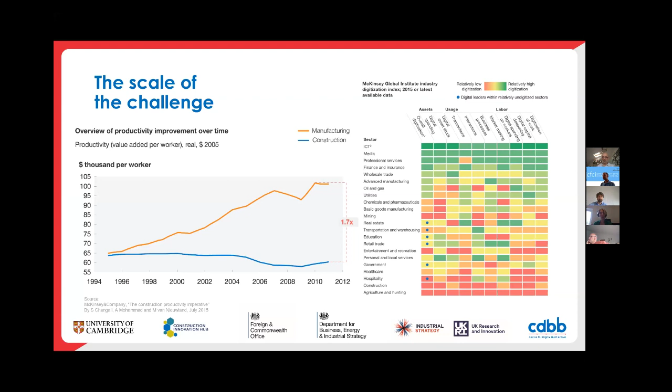So the government has set up the industrial strategy around supporting the construction industry, so the construction sector deal. This is £170 million that's been given to the construction sector for various projects to help us reinvent the sector, support the sector for the 21st century. It's about recognizing for us that by increasing the adoption and use of digital and off-site manufacturing technologies and techniques, we can improve productivity and we can improve life of people within the UK.

So this is what we call a digital built Britain. We think when you're building anything, it could be a building, it could be a piece of infrastructure, there are four main stages. We talk about the design of that building. And at that stage, you need to think about what data do you need? How are you going to share that data? How are you going to make sure that that data is secure by default? How are you going to make sure that you're thinking about who needs to see the data and how they need to see the data?

We need to think also about what about our smart contracts? How to procure, taking into account the data is a really important part of that jigsaw. And we think that this will give us opportunities for new careers and new businesses within the built environment.

You've then got to build your asset, your building, your piece of infrastructure. And we really need to look at digital construction techniques. How do we manage the information? What manufacturing technologies do we need in that build stage? What about kit of parts? What about off-site construction? And then how does digital bring that together? How do we make sure that we're sharing that data securely and resiliently so that contractors, the clients, they can all talk, they can all share appropriate data?

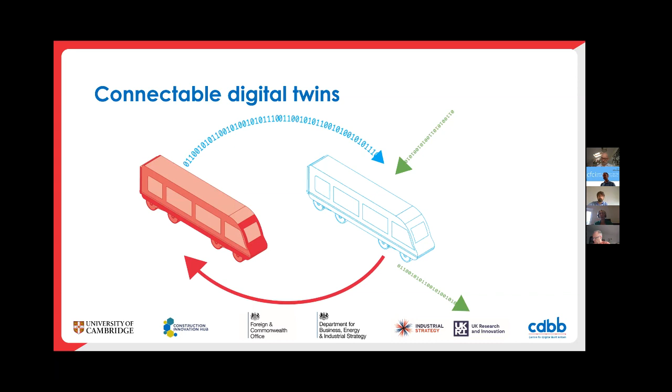You can also have information flowing into that digital twin and out from that digital twin from other digital twins, so connectable digital twins. Imagine you have your transport system here in red. It would be great if we could connect that up with the energy system and the water system, and this is what a national digital twin will do on a much bigger scale.

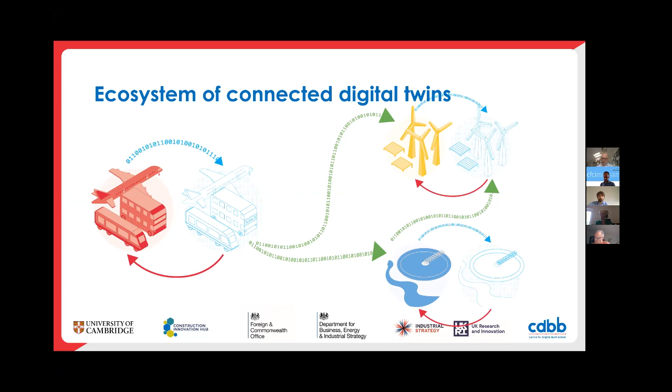So essentially, you have a cyber-physical system. You have your physical system, the world in which we live. For us, we define that as the built environment. That's the remit that we sit in. But of course, it goes out to finance systems, to the natural environment, to the social environment. And by collecting data, sending it to the cyber system, if you wish, modeling and sending interventions back, you then have a connected ecosystem of digital twins.

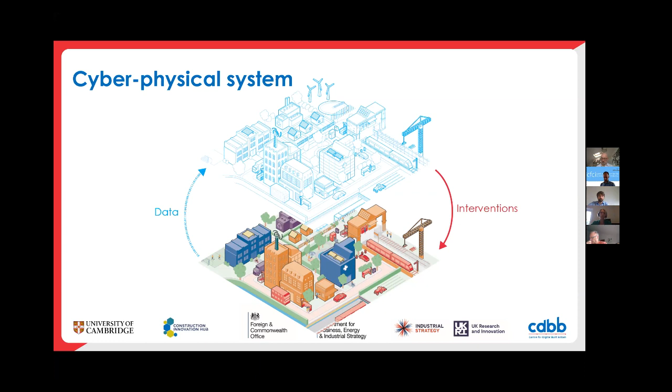The benefits of having this national digital twin are bluntly better outcomes to the public per whole life pound. So we're not just talking about the CapEx at the beginning of a project, we're talking about how do you run the whole life of your asset and how does that affect the people, the businesses, the economies that are attached to that asset. So clear economic benefits, but there will be new businesses.

This is a new way of thinking about systems, a new way of thinking about our infrastructure. New markets, new services, new business models will arise. We're not going to make our net zero targets unless we use our data better. And the National Digital Twin is exactly one of those. It's about creating less disruption and less waste.

It's about being able to do the calculations properly in a holistic sense so that we really know whether this change on this building has a positive impact on carbon, on energy, or whether in the holistic sense, actually it's neutral or negative. So the National Digital Twin has a number of benefits that will come out of it. It's not something that you're going to see turn up next month, but there will be more connected digital twins that allow us to progress towards the National Digital Twin.

I wanted to talk a little today. We're all in a very unusual situation. The COVID-19 pandemic has made us think about how do we work, how do we live, how do we use the buildings and infrastructure in our environment. So this recovery, resilience and transformation in the construction sector is very much at the forefront of our minds at the minute. And we at CDBB have three main ways where we think we can support that.

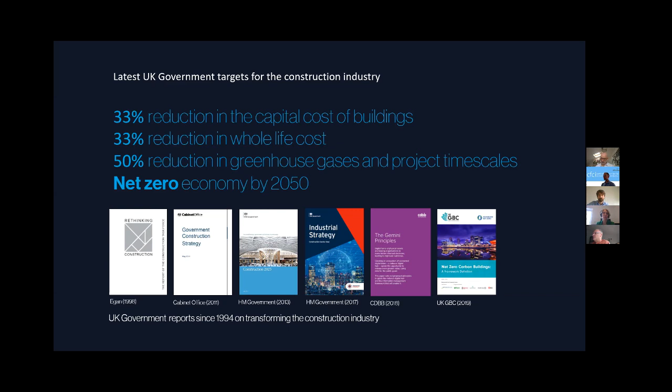The UK construction industry is notoriously expensive. I think I've seen international figures showing that the UK is pretty much the most expensive country in the world to build any building. London, New York and Tokyo obviously vying as the leading cities, but as a country we are very expensive. We don't build efficiently enough.

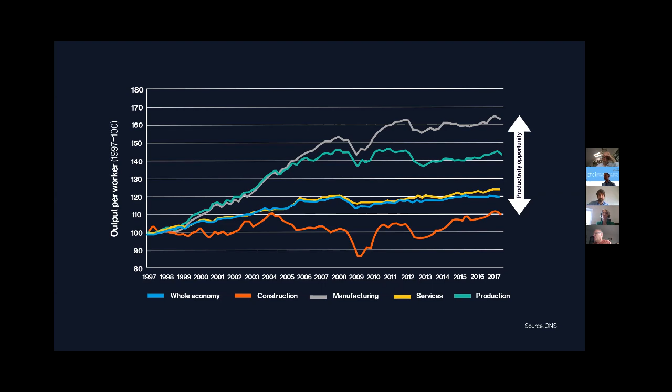So these government targets have been set to address historical inefficiencies of fragmentation and poor productivity of the UK construction sector. We believe that BIM can improve productivity dramatically, and will also create the need to rethink our current working processes and implement more highly integrated project design and delivery processes. So we go to the next slide then.

So this is quite an eye-opener if you're an architect. Remember, we're only humble architects. We're not scientists or people that are that specialised. But when you realise that your industry, the construction industry, accounts for nearly 40% of all UK carbon emissions, but also about the same percentage of all global carbon emissions. That's the construction, manufacturing of buildings, but also the running of buildings.

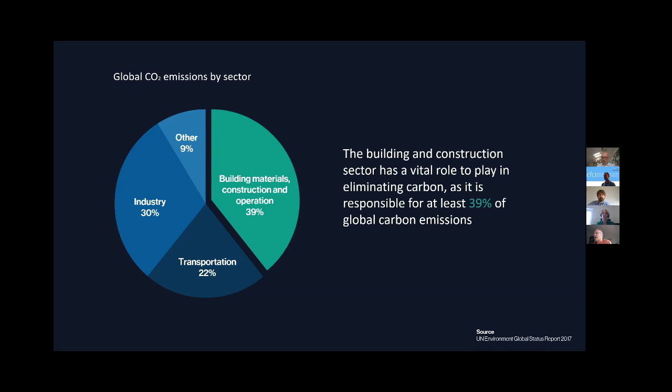This is identified by the United Nations, and our industry could have a huge impact. It's the largest single sector in the world, and therefore we can have the biggest impact for reducing carbon emissions. So there's a huge opportunity.

So this slide is really trying to illustrate that, as we all know, on the left you've got the average carbon footprint of a UK citizen at around 10 tonnes per year. So we thought, well, if you divide the total annual carbon emissions from the UK construction industry by the number of registered UK architects, just out of interest, you come up with a figure of 1,365 tonnes.

So by anybody's standards, architects have a huge gift, an enormous social responsibility to drive down the carbon footprint of their buildings. We can have far more impact than the vast majority of people in society who, even if they cycled everywhere, became vegans or didn't go on holidays using aircraft, could probably only just about halve their carbon footprint, which would be a tiny smidgen compared to what architects could do. So we think there's a huge opportunity here for us to grab. Next slide.

So this again is quite an eye-opener, this slide, for my profession. We're all focused in construction on CapEx. We're all trying to drive down to the lowest construction cost, and until fairly recently, and still not particularly widely in the industry, people are not focusing on the overall life of the building and what it costs. So we've researched and found out that actually 80% of the cost of a project is during the 30 years of operating that building.

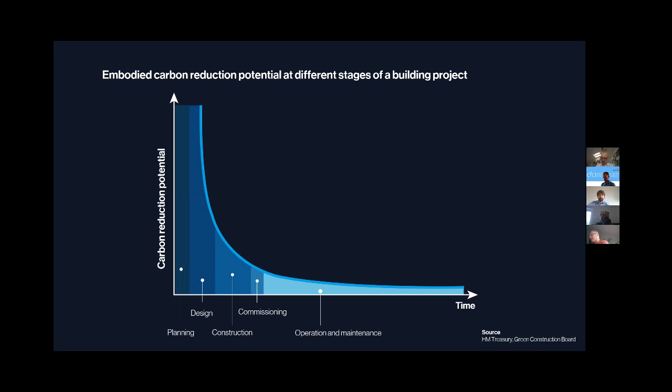Contractors don't get involved in projects until after they've got planning approval, and sometimes not even for a significantly longer period after that. So contractors are left with very little wriggle room, very little space to actually make savings in whole life cost and whole life carbon. It's very much the design consultants who have the golden opportunity to lead the industry. And I believe architects have been marginalized for 30 or 40 years, and it's now an opportunity for us to lead from the front for a change. Next slide.

So our aim is to integrate whole life costs and carbon considerations from the earliest stages of concept design and throughout the design development. Firstly, we've had to standardize information delivery processes and develop a protocol for better information management using BIM. We believe BIM is going to be at the heart of the revolution or evolution that's got to take place in the use of digital technology in the design of the built

environment. We've had to automate repetitive tasks and processes of integrating whole life costs and carbon through the development of prototype software. And we've developed an application to prove our concept. We're actually at a stage now where we're talking to funders to take this prototype application and turn it into a marketable piece of software that will benefit the industry more widely. Next slide.

So how have we defined 7D? We're all aware of the 3D capabilities of BIM. However, the true potential of BIM is in the data attached or linked to the 3D model. This information can be about time, capital cost, environmental performance, durability of components, as well as operational maintenance costs and carbon. All of these considerations together encompass the whole life, holistic scope of whole life cost and carbon.

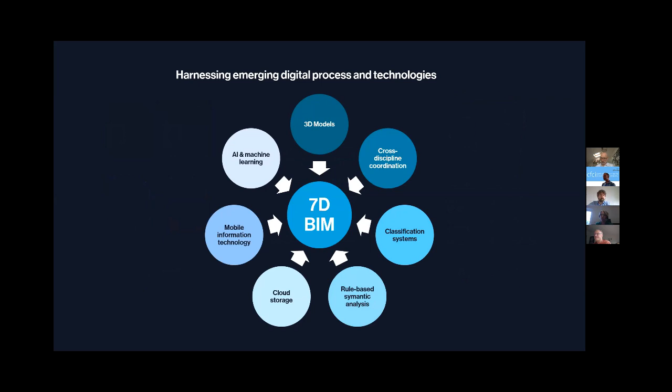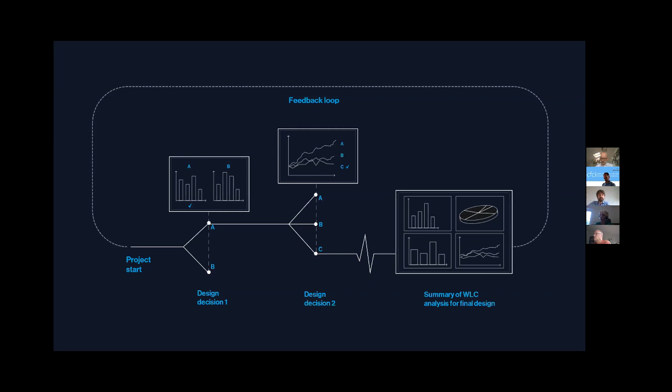The result is a design decision support tool, allowing us to make informed decisions at key milestones during the design development process. The decision-making process, including options explored, is thereby documented and summarized for future reference throughout the built asset's life cycle. Our prototype consists currently of 6 distinct modules. Each of these is a proof of concept in its own right, demonstrating different aspects of functionality.

At the core is the web app. This is where the actual calculation happens and project information is stored. We decided against the desktop app for better accessibility and a quicker deployment across large project teams. There are links to existing cost databases. Currently, we support 3 different sources, although in the long term, we hope to build on live data that is fed back through a standardized process.

Plugins allow us to pull in model information into the web app and also present results back to the designer, supporting them during the decision-making process. While we have dashboards within the web app for easy dissemination of results, we will allow stakeholders to integrate the output within their own business intelligence systems, such as Power BI. To allow integration with an ecosystem of related applications, we will provide an API using Swagger.

Simplicity and a low entry level are important aspects for our team, allowing the user to engage without complex barriers and making it viable even for early design stages. We can start with something like a volumetric massing model, just an example here created in Revit, to calculate a high-level whole-life cost estimation based on a simple unit mix.

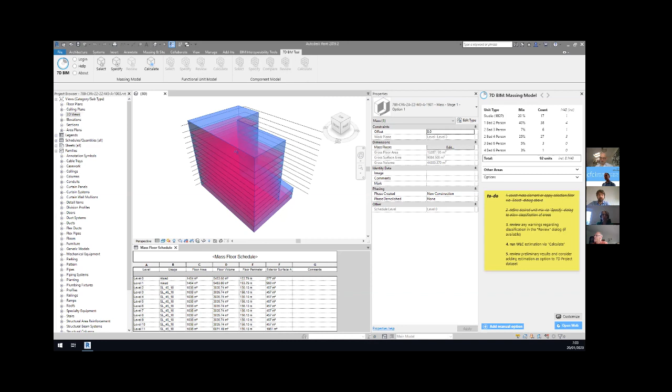We're obviously aware of other design tools, aside from Revit, sometimes even more sophisticated generative design tools. We intend to integrate with these via native plugins through the most common authoring tools, but we will also support other tools via IFC.

However, we're keen to demonstrate here that it does not need to be complex. Each variation or calculation is stored as an option set in the project database of the 7D tool, from where it can be compared against others' previous considerations.

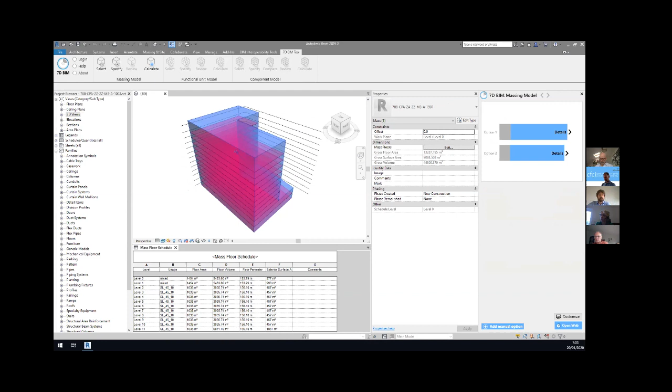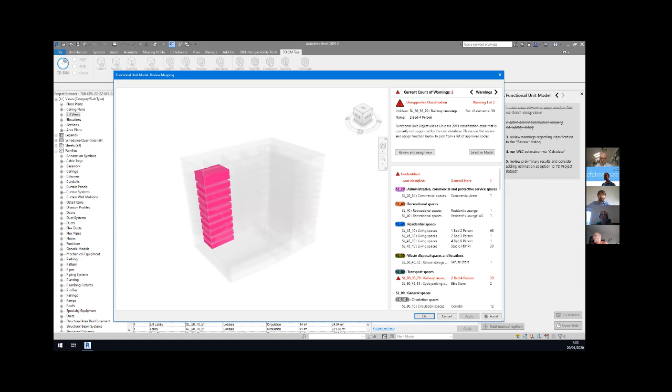Critical for reliable functioning is a robust and efficient mapping between the model elements and cost items in the database. While there are some means to assist users through auto-detection of missing or wrong element mapping, there will be also a straightforward tool for visual inspection, allowing the user to identify, isolate, and correct issues directly within the tool's interface.

Coming now to a more detailed example. However, it's not always that we want to remodel elements to test alternatives. Taking this stage 3 or stage 4 component model as a basis, we can see the cost for all aluminium windows as present in the model and calculated by the tool is around £3.3 million and a carbon impact of 868 tons, both over a 50-year period.

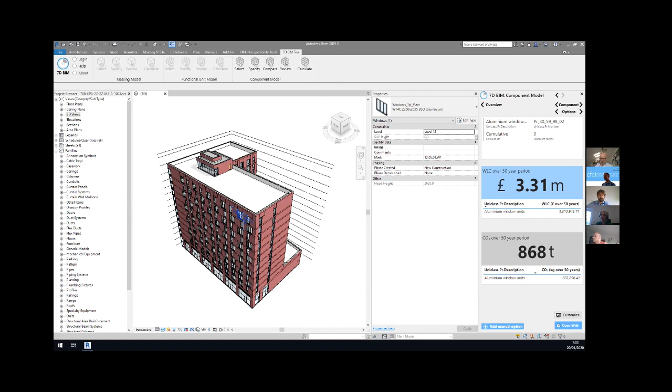Instead of remodeling or changing the element parameters in the model itself, we have the possibility to override these as an option directly through the 7D tool's interface. Without changing the elements of the actual model, we are now giving the what-if feedback or override option.

In this example, we can now see that 425 windows, if made from timber, would cost us £4.1 million and emit an equivalent of 393 tons of CO2. Notwithstanding other aspects, of course, spending £790,000 more over 50 years appears to save 475 tons of carbon. That would equate to an individual reduction of 55% alone.

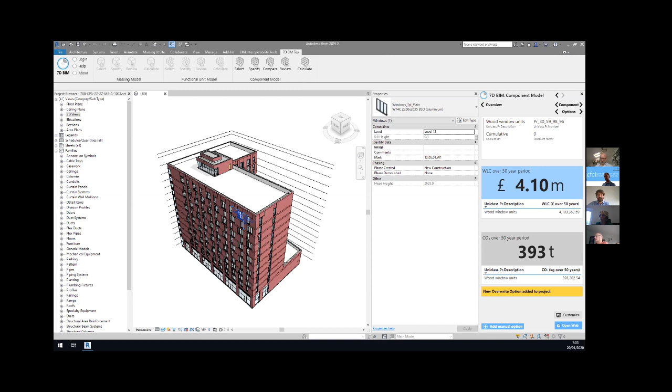Just a warning, the next slide contains an animation. It's intended for a live presentation and sometimes it stutters a little bit on Zoom.

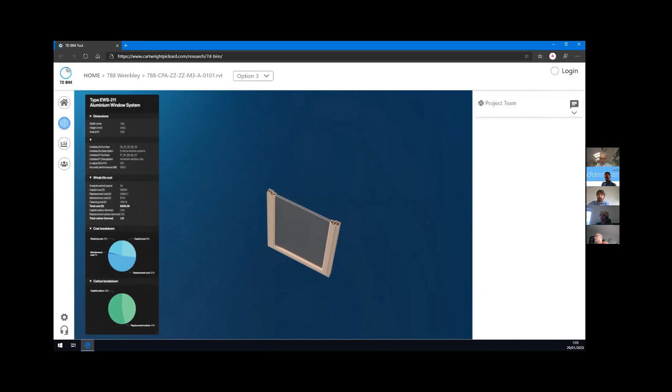So while the plugin, as seen in previous slides, addresses the needs of the designers, the web front end will allow other project stakeholders, such as clients and operators, to engage with the process as well. Data from the plugins is synchronized via the web front end and vice versa. The integrated model viewer is thereby intended to use the actual CDE-hosted model, subject to the CDE's use, removing the need for separate uploads and making sure that the entire project team is using the same most up-to-date model at any time.

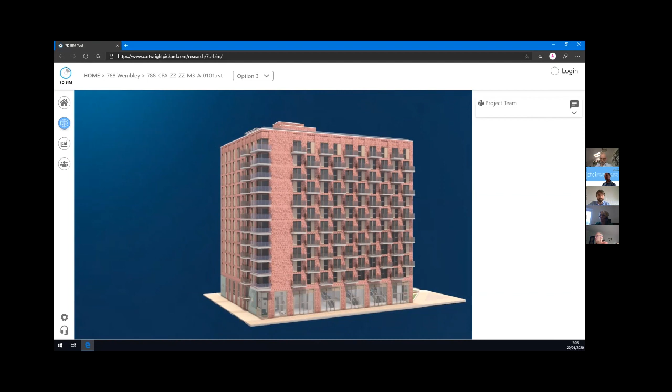While this web front end is also where the project is set up and managed, the 3D model view and dashboards will give direct access to the various whole life cost options. These dashboards will provide in-depth analytics, helping the user to understand the relationships between components and design options.

At this point, I say thank you, and I'll hand back to James for a closing summary. James, I think you're still muted. Oh.

Thank you, Philip. You've only seen a very small snapshot of the prototype software that we've developed in the time we've got, but hopefully that gives you a flavour for what we've been doing. If you go to the next slide, Philip, please. So we just set out what we consider to be some of the wider benefits if we can make 7D BIM a reality and not just our dream.

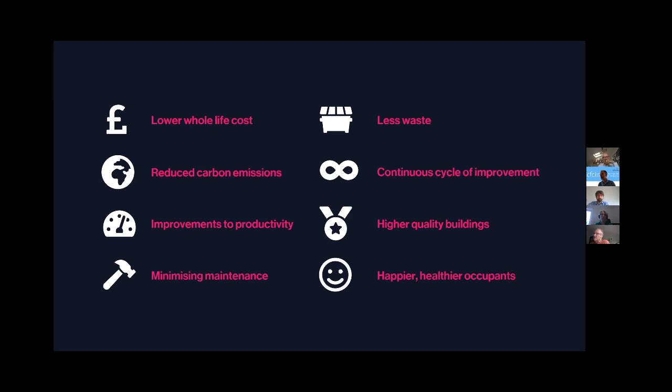We see this as a golden opportunity for architects and design professionals to lead the industry for once, and to stem a continuous sort of marginalization of the design professions, who I think have been not proactive enough or left out of it for far too long. And now is the time that we can actually have a really good impact and help the changes that are required.

And I did say earlier, we finished 2.5 years of research and developing the prototype software. We now need to raise the funding for another 2 to 3 years to turn this prototype into a marketable piece of software. So anyone in the audience that's interested to talk to us, we'd be very keen. We're already talking to some quite large industry investors and some of the previous sponsors of the research, but we're certainly in a position where we're looking at fundraising now to make this a reality.